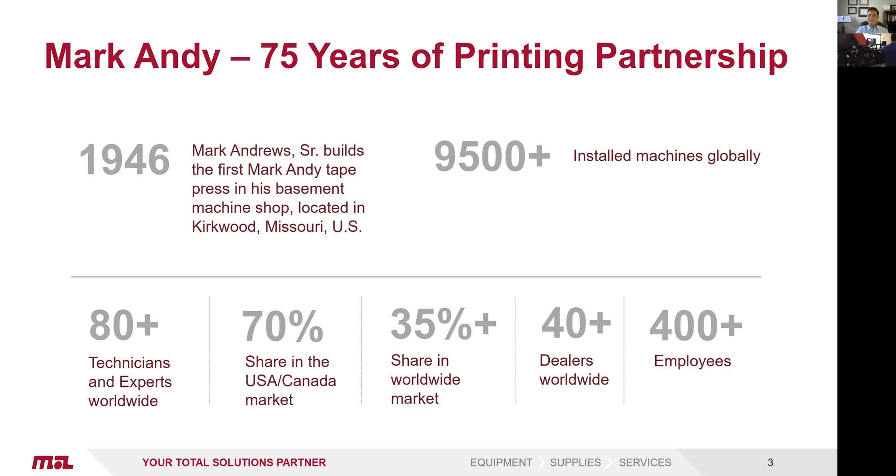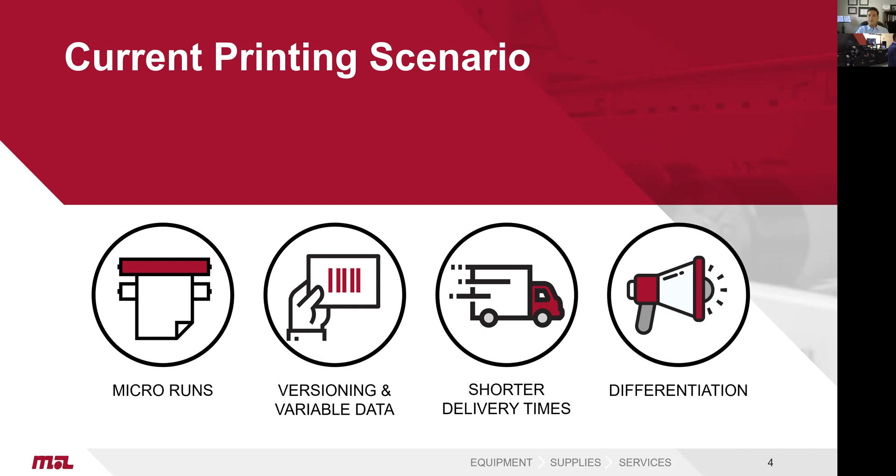Today, market dynamics of the label industry are changing, and Mark Andy follows market needs closely. Brands are also requiring solutions that not only address shelf appeal, but drive customer choice and provide functionality in other ways—this is a digital transformation. The needs include micro runs, versioning, variable data, short run and short lead times, and product differentiation. These are at the forefront of what brands are asking for.

The Digital One was the machine that responded to this. Our printers requested this over the years, and in 2016, we launched this platform. It was an enormous success, an affordable and revolutionary digital hybrid solution that reached record sales volumes. The machine had a fixed configuration.

Feedback from label converters started to develop over the years. Some of the requests included semi-rotary die cutting, white printing for no-label look labels, more slitting solutions, and roll-to-sheet capabilities. That's when Mark Andy engineers went on the mission to design an even more comprehensive solution that would encompass all of these new requirements.

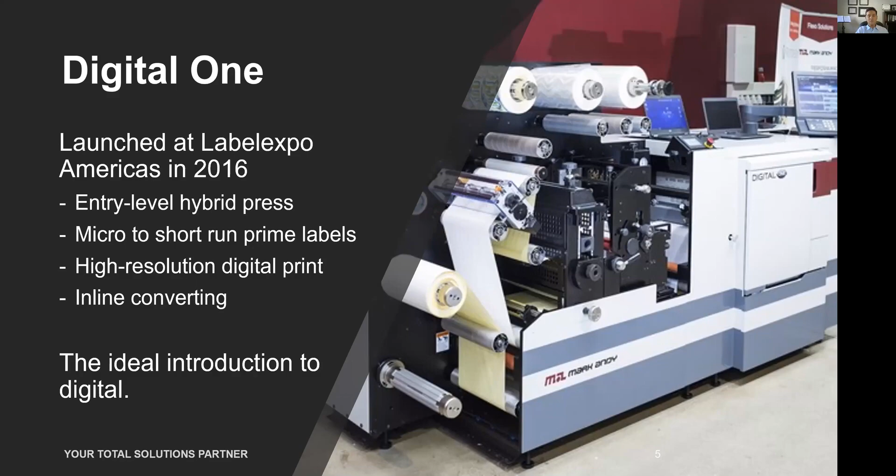What came of that was the Digital Pro, and in late 2019 we launched the machine that focuses on increasing profitability and productivity through high speed, low cost to print, and a variety of converting options. The Digital Pro is everything the market has come to know and love about the Digital One, but with a pro factor: productivity, profitability, and a future-proof promise.

So let's do a quick walkthrough live from the US Technology Center with Ted Bright and learn more about this machine. Thank you, Alex, and welcome to the US Technology Center for Mark Andy, right here in beautiful Chesterfield, Missouri. We're going to go through a brief overview of the machine, just like Alex said.

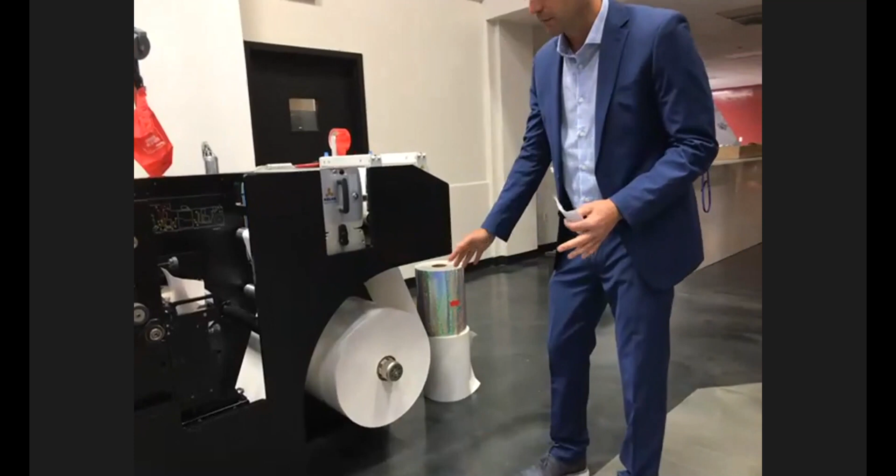So again, this is the Digital Pro, and we're going to start with our 30-inch unwind. That's going to be about 5,000 feet on a typical substrate. And we've got our web guide and our web cleaner.

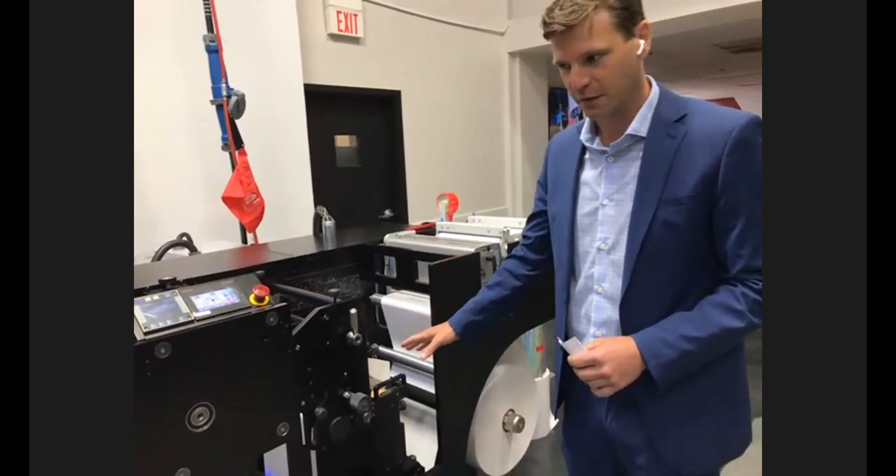One of the unique aspects of Digital Pro compared to Digital One is the first flexo station. After the first flexo station, we come into the digital in-feed casing, and then right into the digital module. As Alex alluded to, this is a CMYK Konica Minolta print engine, printing the CMYK process. Also unique to Digital Pro is the digital bypass.

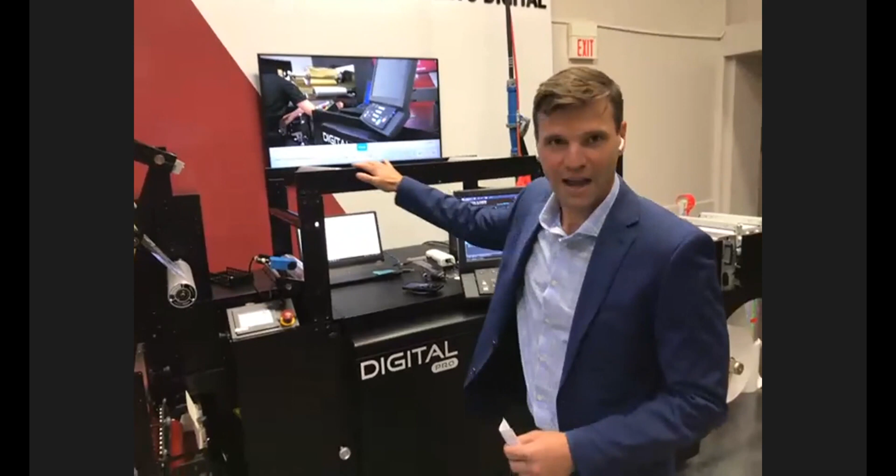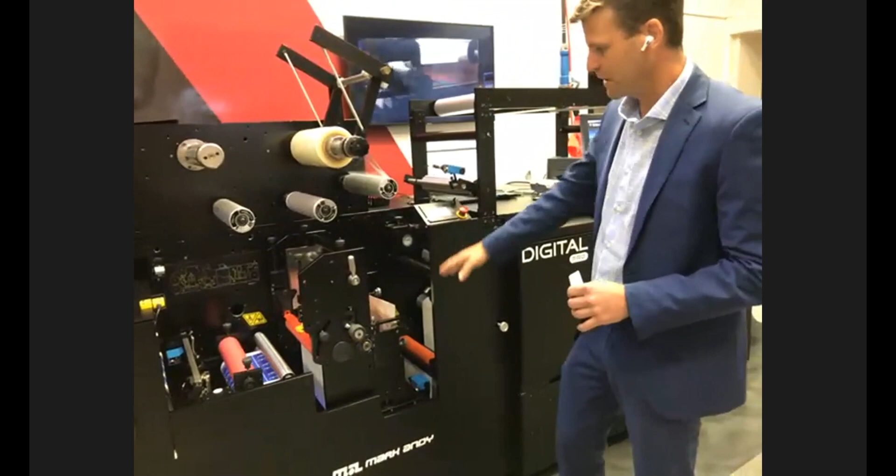We'll get more into that in a minute, and you'll actually get to see a job run on that. As we exit the digital module or the digital bypass, we come into the second flexo station, where most customers are putting a spot color, a varnish, or a cold foil.

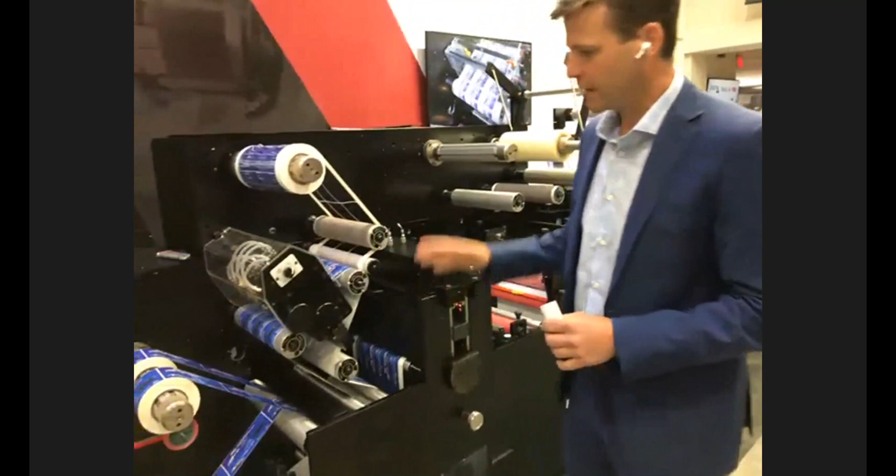Of course, we have our lamination tower, and then we come into one of our other biggest differentiators on the Digital Pro, and that is our semi-rotary die cutter—much more on that later as well. After the semi-rotary die cutting, we've got our scoring, slitting, and then our dual feed rewind.

And at this point, I'm going to go ahead and kick it—I'm sorry, we're going to get right into job number one.

So as we're warming up, I'm going to talk a little bit about job number one. It's a single SKU job, printed at 77 feet per minute, which is the maximum speed of the press, and a common theme you'll see throughout this demo. Job number one is printed on a 54-pound UPM semi-gloss paper with a 40-pound kraft liner.

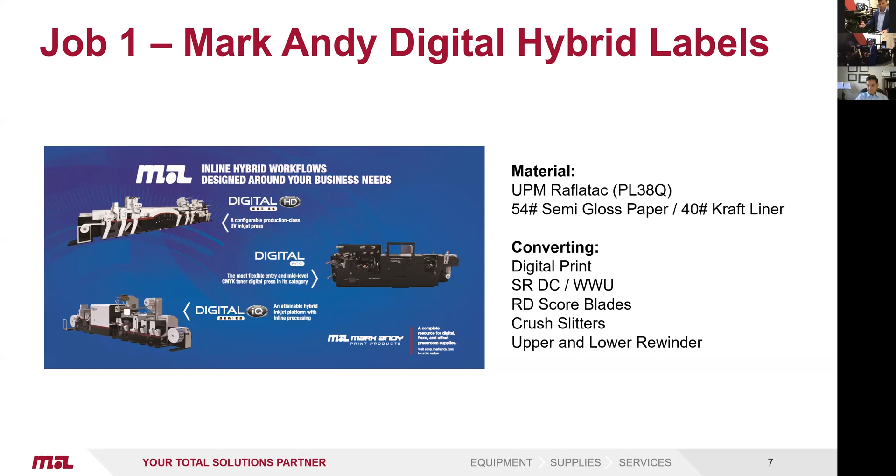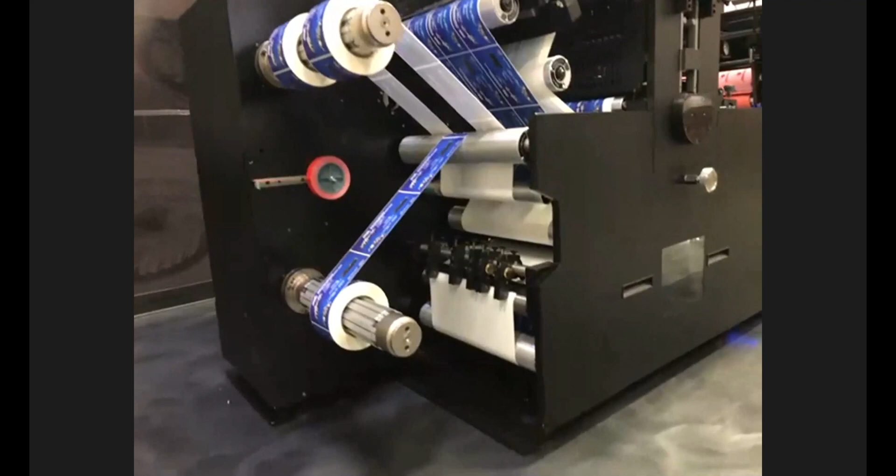Some of the highlights you're going to see on job number one are the digital print, of course, the semi-rotary die cutting and waste wind-up, RD scoring blades, the crush slitters, and the upper and lower rewind, which are critical for proper tension and quality on the finished rolls of labels that you get right off the end of the press.

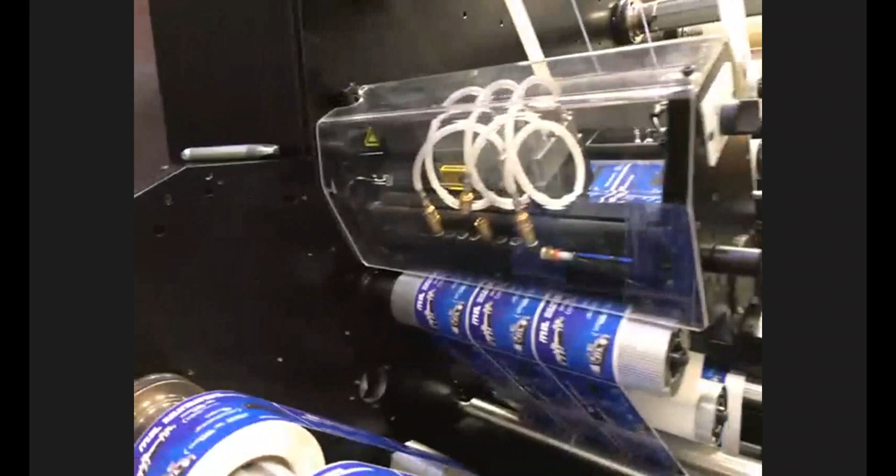Alfredo was nice enough to go ahead and prepare a fine looking sample on a black background here.

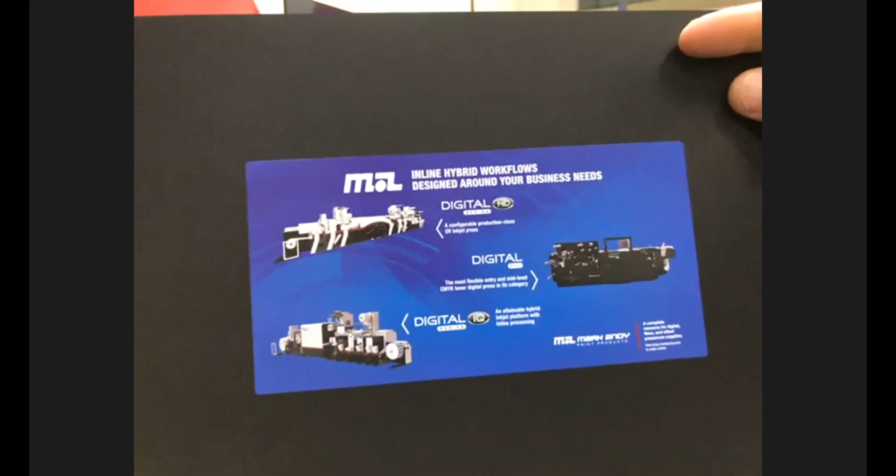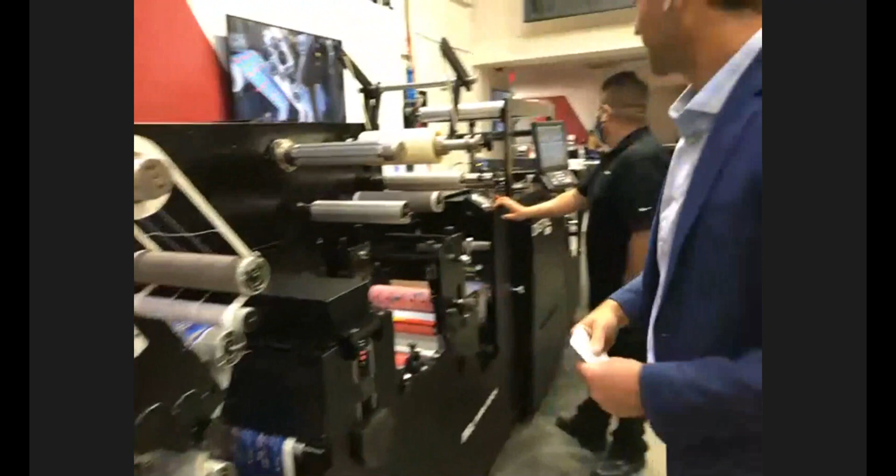So again, on job number one, I think you'll see this is probably just an average typical label that we would see in the majority of shops all across the country, and it's perfect for the digital pro. Some of the highlights are the digital print, of course, being CMYK, and the die cut. This is a perfect illustration of die cutting and then slitting onto 3 finished rolls.

That's great. Thanks, Ted. Let me just take a moment to solidify some of the things that Ted talked about. We'll go from the left side of the machine all the way to the right side of the machine just to solidify.

We said that we have an unwind. This is a hybrid press. You're going to put on a roll and take off a roll. A 30-inch unwind feeds into the web guide. The web guide has a splicing table on there. We have the cleaner right there on the press.

We have an optional white flexo station that's capable of laying down the white. Our digital CMYK has a re-registration that can print right onto that white. And by the way, that white is a high opacity white available by Mark Andy. The CMYK is produced by Konica Minolta, and this engine is tried and true. Only in the United States, there's well over 10,000 of these units running on a daily basis in both commercial and industrial segments. So it's well supported by Konica Minolta, an international brand that has a great relationship with Mark Andy on this platform.

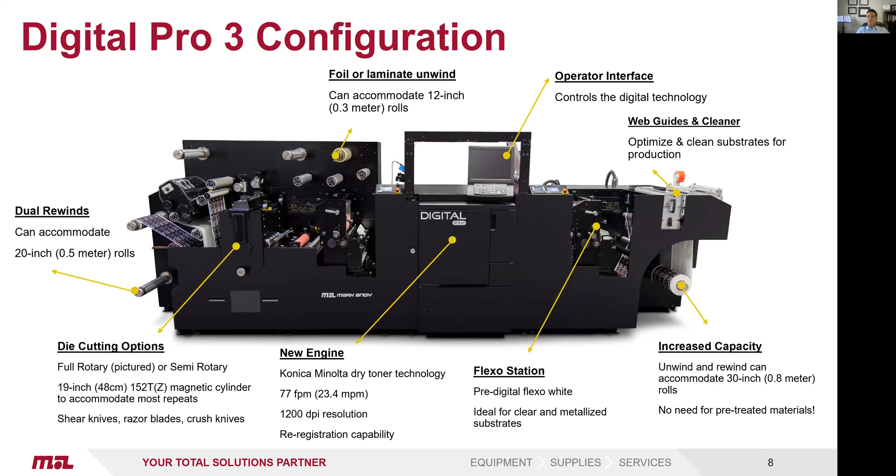Finishing is all in line. You don't have to take it somewhere else. You feed it through your varnish station. You can over laminate, you can spot varnish, you can put down cold foil, cast and cure for those that are familiar with that, and straight into semi-rotary die cutting. We'll talk a little bit more about that in the future. Then we'll get into a discussion about the slitting straight in line. You can do that online or offline if you'd like, depending on the sizes of your jobs, and the capability of doing dual rewind. We'll talk about some options around this press as well.

Oh, and I forgot to mention that bypass.

So as we look at some of the applications that are important to mention, the market is constantly looking at quality around print, and one of the things that really make the Konica Minolta a shining star in the industry is the rich black toner. If you get samples printed up, if you contact one of our sales guys and get together a set of samples printed for you, you'll find that our black toner is phenomenal. The gradations with this print engine are also outstanding. You'll see that in the quality of the print samples you get.

The exactness of small point printing and line printing is remarkable. With barcode printing, we have the capability of doing variable data, sequential numbering, sequential imaging. All of this is capable with this affordable press, and all in line and all hybrid.

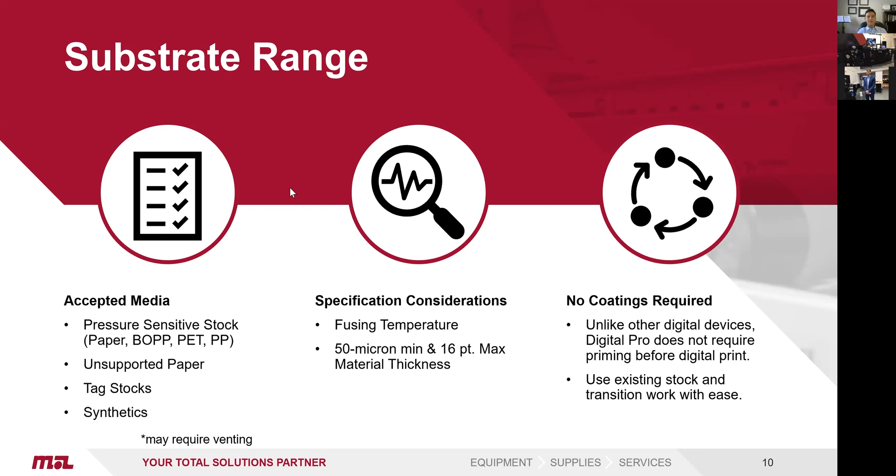I think that you guys are ready with the new job. Am I good? Am I right? Yep, you are. Of course, Alfredo is on cue as always.

Just to add a little bit to your last comment, Alex, every shop is going to have those handful of jobs that take a couple hours to set up and a couple minutes to run Flexo. Whereas if you can transition those jobs to the Digital Pro, you have a very compelling business case to justify the investment, because it only takes a minute to send the job to press.

It truly is. The Digital Pro has simplified digital printing to where it is comparable to printing to a desktop printer. Not quite that simple, but there are similarities in concept.

You're going to have a handful of those types of jobs that it truly does go a long way. On average, I'm seeing about 10 jobs a day can really go a long way in justifying the full investment of the press. That would depend upon your job, of course.

Right, and we've got a job up right now. Can you tell us about that? This is a new market, CBD, the ever-burgeoning CBD market.

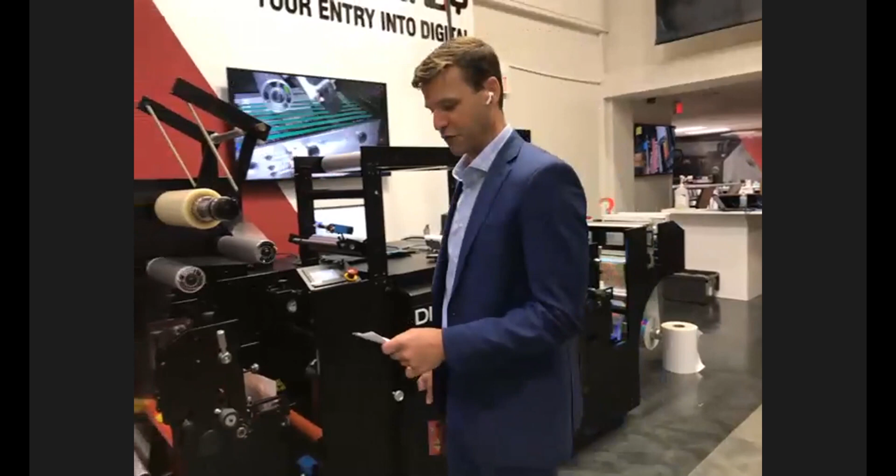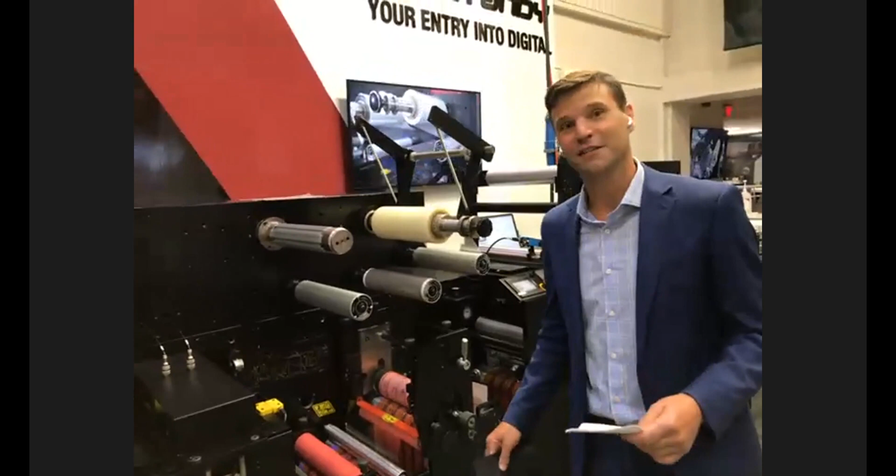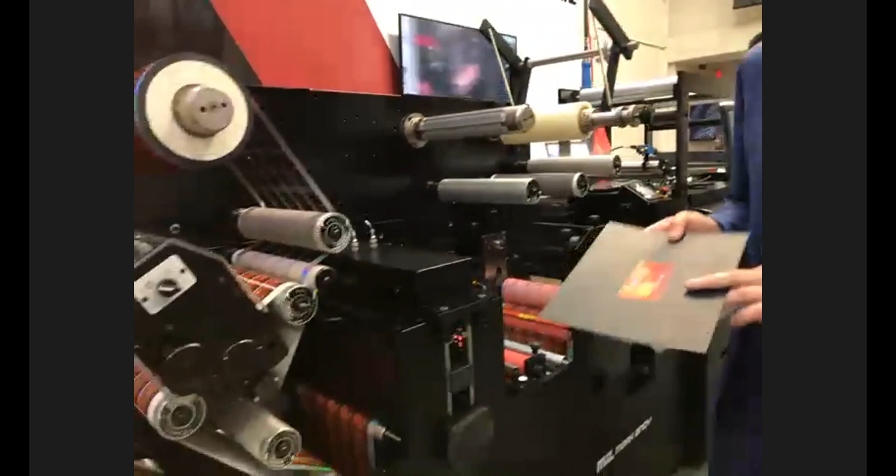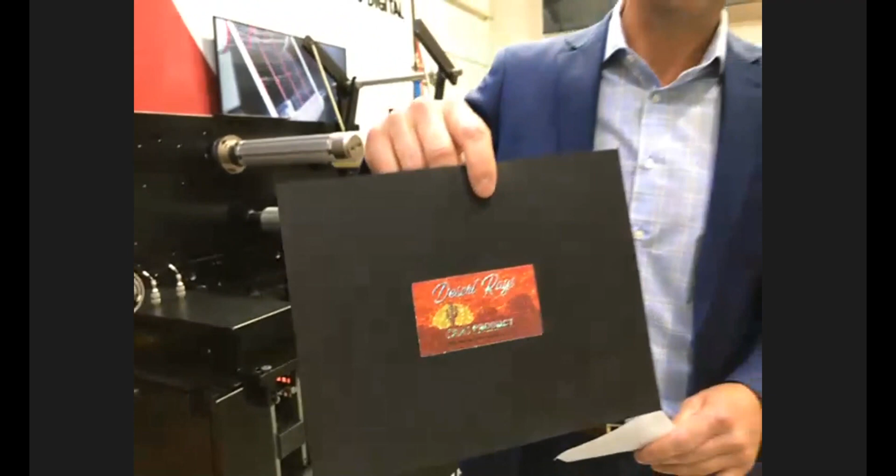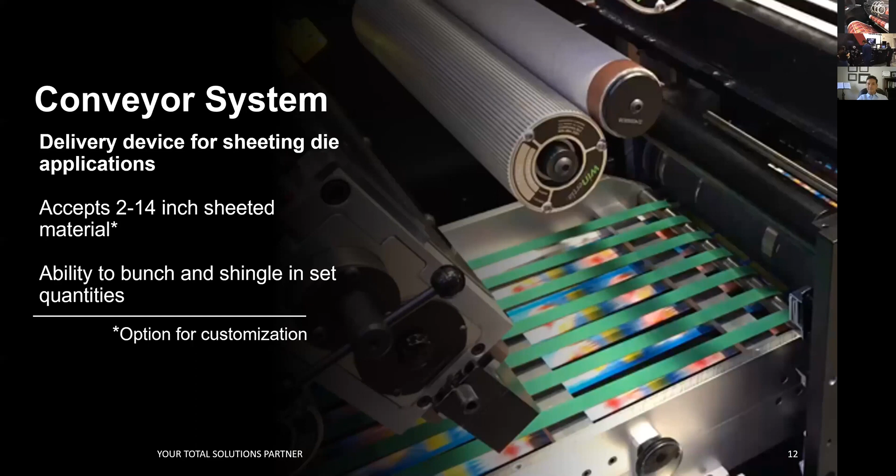So that's going to wrap up job number 2 as we focus in on the dual feed rewind in single feed mode, I should say. And Alex, at this point, we're going to queue up job number 3, going back to you, Alex.

Good. Let me talk about some of the options here. Let me introduce our guest today to the Digital Pro option for the finishing side of the press. As you saw earlier in the live demo, the standard configuration of the press comes with an inline semi-rotary die cutting module. That's the Digital Pro 3.

If you wanted to buy the press roll to roll, that's also available. But the semi-rotary die cutting allows you to cut varying repeats or label sizes by simply changing a flexible die cutting plate, saving time from job to job.

The major benefit for the semi-rotary is that you're reducing your hard tooling inventory and the expenses of buying these solid dies. Or even if you had a set of magnetic dies, it's still a much better option to go with semi-rotary, and your particular sales representative can go deep into that conversation if you want to have that.

For today's purposes, I also wanted to cover the optional conveyor system. This is something that our customers asked us for. This is a completely modular system, an option that can be attached to the press to create roll-to-sheet applications at full speed.

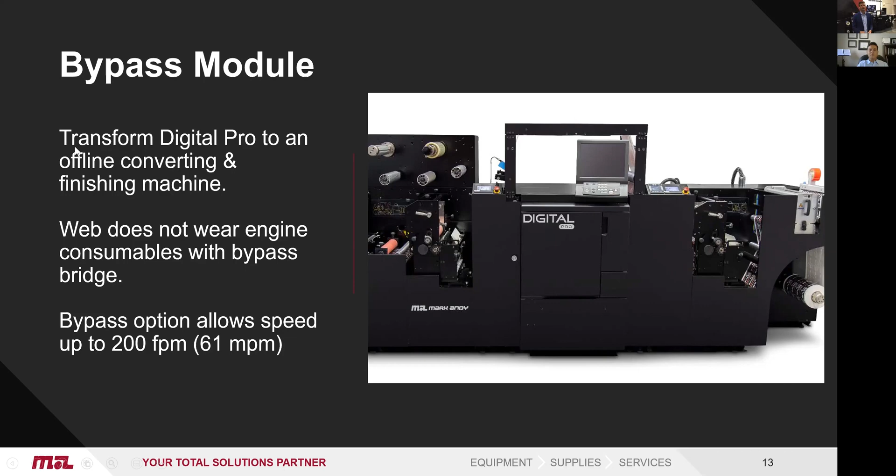And Ted, I have a question for you. What are some of the other options that can be added to the machine that I might have overlooked, other than the conveyor system and the bypass module that are available to our printers?

So I think you highlighted the primary options that the majority of customers are either interested in or go with. From Digital One, we've evolved to where we have the second flexo station, which would be prior to the digital module, so that's an option. The semi-rotary die cutting is an option. Of course, we've got the bypass that you mentioned, and there's other options such as more advanced slitting options, and you can get things like an adjustable clearance anvil if you wanted to try to prolong the life of your tooling. Right, any small things?

Another thing we mentioned earlier are all the various software options, which are quite extensive now - color management, VDP, and a lot of layers of different software applications. We definitely want to get our pre-press team talking to your pre-press team to figure out what that best solution is. Another option that a lot of customers go with if they're running narrower webs would be an additional fusing unit. That way, as you mentioned earlier about wearing, utilizing the bypass tray or bypass web path to not wear on the fusing unit within the digital print. Same thing, if you're running a 10-inch substrate on a regular basis, you could get an additional fusing unit, and that way you're not putting wear and tear on your primary fusing unit.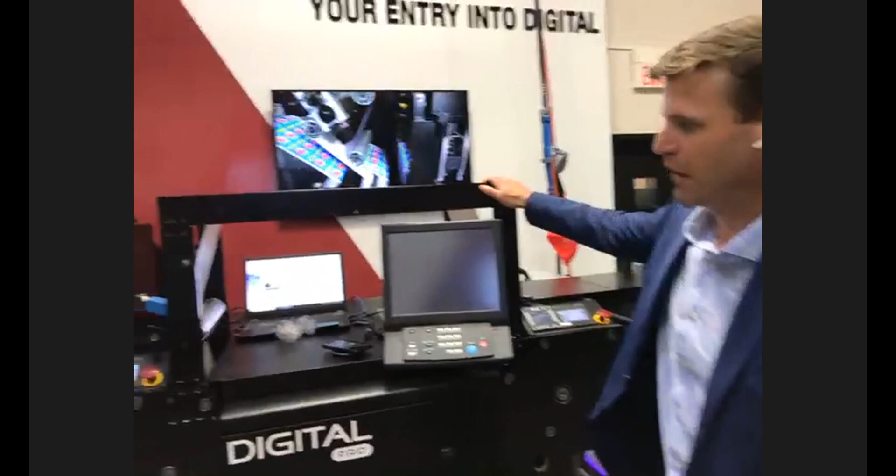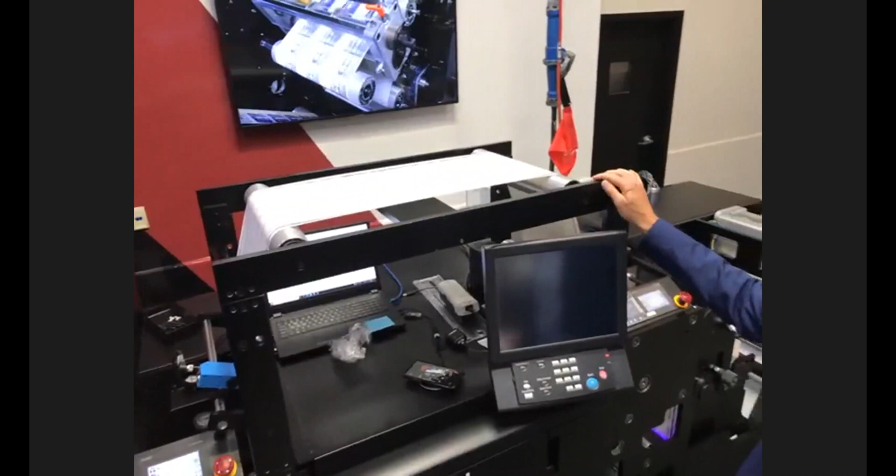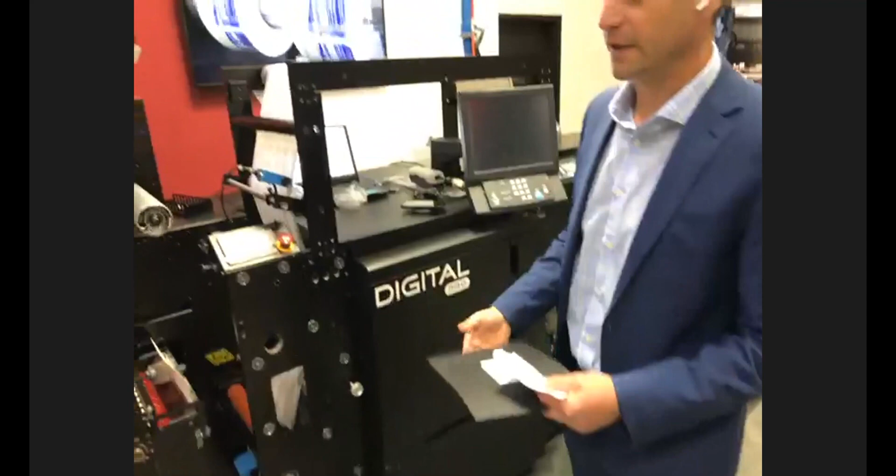Again, this is really just software with a steel frame - or I guess it's actually an aluminum frame - but it's a very inexpensive option that can drive a lot of profitability. Like we're seeing here on this job, the 2-color flexo ran at 150 feet per minute on the semi-rotary die cutting. This was run on a 2.4 mil white top with a 2.2 high density paper lining. And of course, we're utilizing both flexo stations, the semi-rotary die cutting, and the waste line gun. Alfredo prepared that beautiful label for us.

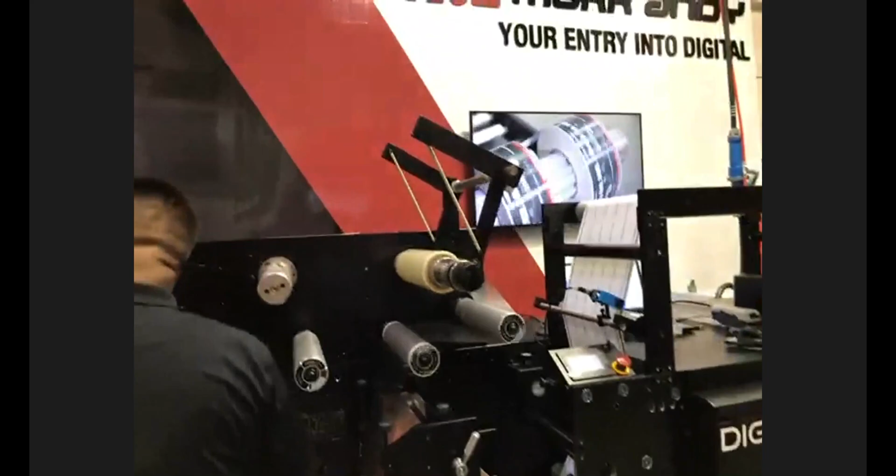That's really nice, Ted. Very good, Ted. All right, so I'll kick it back to you, Alex.

Yeah, so Ted, I just want to wrap up with the pillars of success behind the Digital Pro. Key takeaways are 77 feet a minute, easy operation - very easy to operate for operators and to get maximum amount of jobs through in a shift - a low cost to print, and a press that's extremely flexible. Flexible not only for today and the jobs available today, but into the future as well. As you saw, the platform prints faster. It prints at 77. The machine operates at well over 140.

So, solid press. Christine, I'd like to ask, do we have any questions out there in the field that need to be addressed before we wrap this up? Of course. Thank you, both Ted and Alex and Alfredo. Great jobs to show this afternoon. So, if I can ask you Ted, you mentioned cold foil.

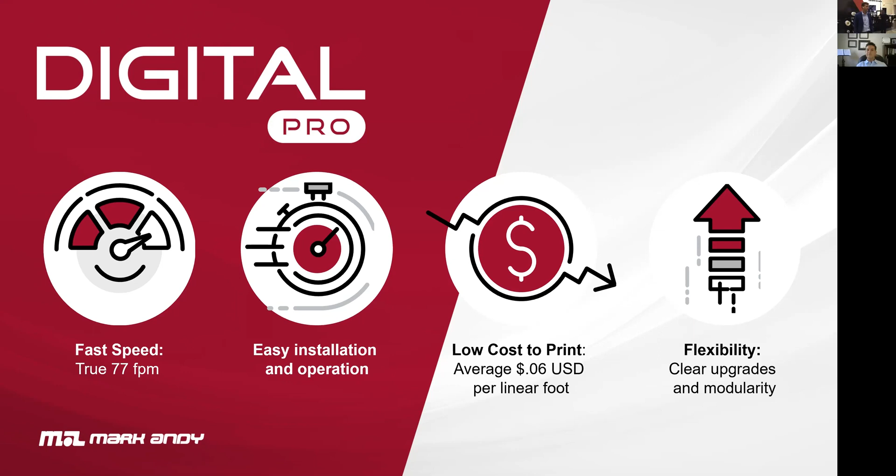Can you use any suitable foil color, such as copper, red, green, etc., as opposed to overprinting a silver or gold foil to create a color? Yeah, we see customers using a wide array of colors on the cold foil. I don't see that being a problem. Of course, if there's something we don't know that might be a limiting factor or a challenge, we would just want to run it in the demo room. Let's test Alfredo with it and see, but my guess is yes.

Okay, great. So in reference to cold foil, the most important aspect of cold foil, of course, is the adhesive and the release of the adhesive. So those components are most important. And Mark Andy has a slew of people that are very well versed in these applications, and that's what we're here for - the entire solution. Christine. Perfect, thank you very much.

Great answer, guys. Alex, I'm going to send this next question to you. Is there any thought of upgrading the Konica digital unit from CMYK to CMYK OGV? I feel that the extended gamut color gives us richer print on an image-centric label.

All right, so very good question. The Konica Minolta engine is a CMYK engine, and again, this is a physics answer - we can't do OGV, that's not available. So expanded gamut on this press is limited to CMYK. We've got the white, we mentioned the color gamut - Ted talked about that in this presentation. We have a series of digital presses that are extended gamut. They're inkjet, and they go well over and beyond the color array of only CMYK. So that discussion is obviously available if you want to dig deep into Mark Andy's digital product line - that's where we can have that conversation. Yeah, great.